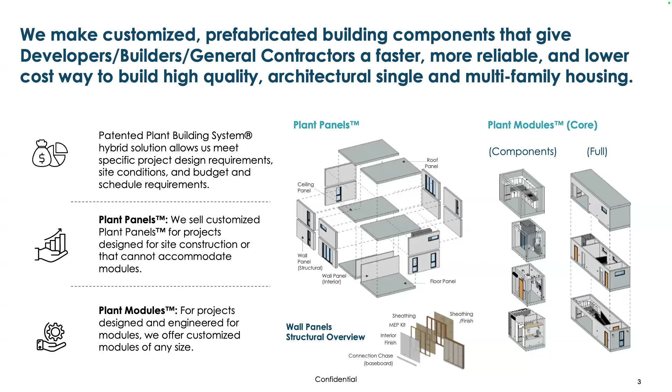As I mentioned, we have the only factory in the country purpose-built to do both panels and modules. Panels are like a part of a structure—a wall panel, ceiling panel, floor panel. Modules are volumetric; for us, they're comprised of panels. Both systems can do lots of different types of panels. We don't tend to do just framing—we typically give you your weather wrap, windows, door framing. We can even talk about MEP.

Each system has certain advantages and disadvantages, and we do both because our focus is to look at your design and figure out the most efficient way to build it. Modules are great because you can build in parallel to the site work, so you typically save a lot of time that way. We have an automated, all-weather facility, so we're able to dramatically compress production schedules. A 3,000 square foot modular home on average takes maybe 3 months in the factory, again in parallel with site work. For panels, it can be a week or two.

The downside of modules is that they can be expensive to ship and install, and because of the redundant structure and some of the limitations of transport, you have to think carefully about your design and how it's laid out.

Panels don't have the redundant structure, and by the way, the redundant structure is more an issue for multifamily. Sometimes you have to reduce unit count because of it. But regardless, oftentimes because of the issues with dimensions, it can affect how you think about space, both internally and in floor plan and elevation.

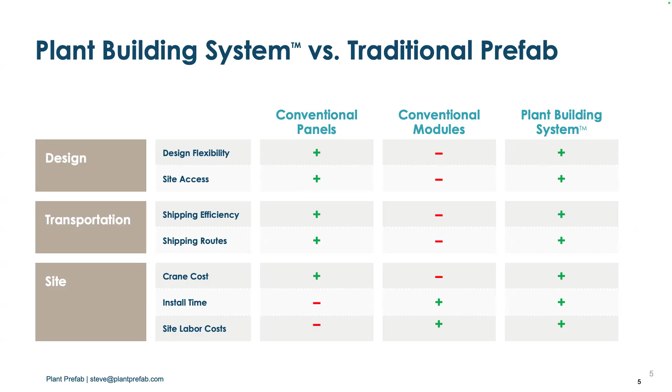For a panel project, we can use designs that have been designed and engineered for a traditional site-based process. For modules, it has to be designed and engineered specifically for modules. So panels are often the only solution based on where you may be in the design process, or maybe your site doesn't allow the transport and installation of modules. They both have certain advantages and challenges. We do both - some projects are all panels, some all modules. Oftentimes, particularly for single family, it's a hybrid.

So what are some of the advantages? Well, I alluded to one already - massive compression of schedules. We have a project, a duplex, 3,000 square feet in Venice. It was installed in March, end of March, and they're expecting the C of O any minute. That's a 7 month plus process from start of construction to C of O - much faster than a traditional process on the west side of Los Angeles.

Can be reduced cost, it's not always the case, it really depends on what we're doing where. We've got a developer - we did a number of homes for a development in Lake Tahoe, and the developer, who had built homes in the exact same area, actually on the same project, using a site-based approach, estimates we saved him about 20% from what it would have cost with a traditional process.

But like I said, sometimes it's not always savings on a per square foot basis, but that's not really fair. I mean, understand that everybody looks that way, but it's really project cost. And if we save you 50% of the time, 30%, you're saving money - carrying costs for your construction loan or equity if it's a developer, or rent if you're an individual living somewhere else before you can move in. So really, the right metric is total project cost.

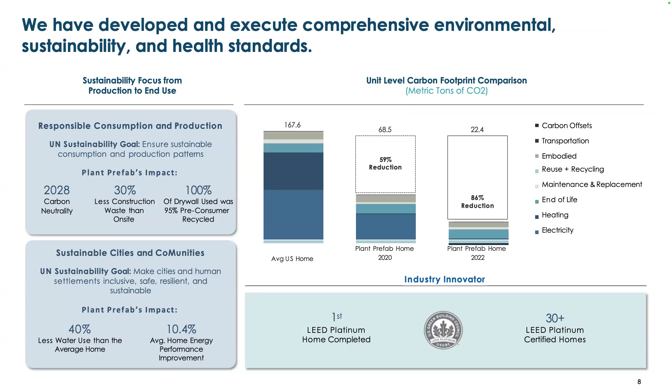As I said, we take sustainability pretty seriously. We've done more LEED platinum and gold certified projects than almost any other factory in the country. The multifamily project we did with Brooks Scarpa, we expect to get gold certified.

So that's 13 units. I'm going to show you some pictures of projects we've completed, and then we'll do a quick video of our factory, give you a tour of the facility. We are very busy with fire rebuild projects.

We have the only high capacity automated prefab facility west of the Mississippi that does single family homes. We're one of only two automated high capacity prefab facilities in California - the other one only does multifamily. We specialize in customized architectural projects. You're going to see a number of projects in design with other architects.

Here's one of 32 homes we did in Lake Tahoe, that project I mentioned earlier. The Ray Kappe in Malibu, that's the interior. And by the way, we are wood frame, but we have a steel shop - you'll notice some moment frames and steel staircases. We do that when it's part of the design, like the project we did in Palo Alto with Toby Long - there's one of those moment frames and steel structural elements to which I alluded.

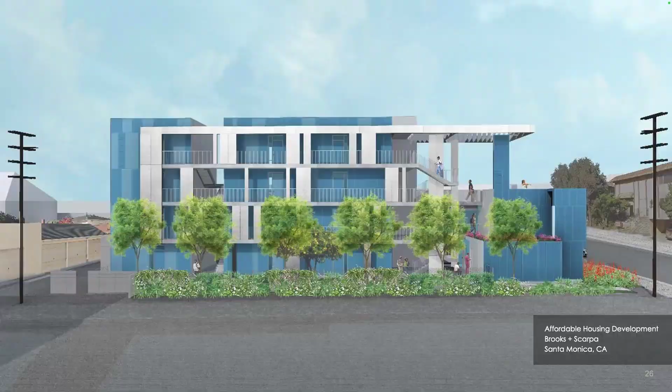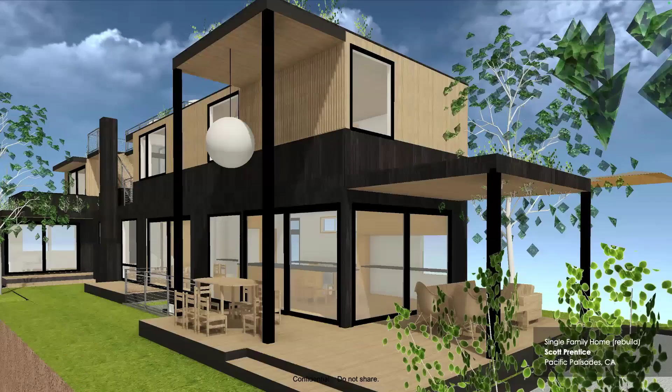This should be done, by the way, C of O in January. I just want to show you some of the rebuild projects first from Scott Prentice, and then you'll see some homes we're doing with bespoke design, and then with Toby Long.

So we'll, like I said, have some design guidelines, and you'll get more about this then. But a few thoughts: one big difference in working with prefab versus a traditional process is you really need to think through a lot of your design details upfront.

In fact, as you'll hear, we take your architecturals typically halfway through CDs, and we do a manufacturing model. You'll see an example of that. We do that because ultimately we need from that model the shop drawings, but embedded in it is the machine code that tells our automated equipment what to do, and you'll see that. But the other reason we do it is to clarify any coordination issues.

We're issuing RFIs at that point, and so we're working with you to clarify all this up front. In a traditional process, you have more time, frankly, to work on this. So everything gets front loaded, but then things move much quicker as a result. Your CD set really needs to be a very complete CD set, more so than some of the architects that we've worked with are used to.

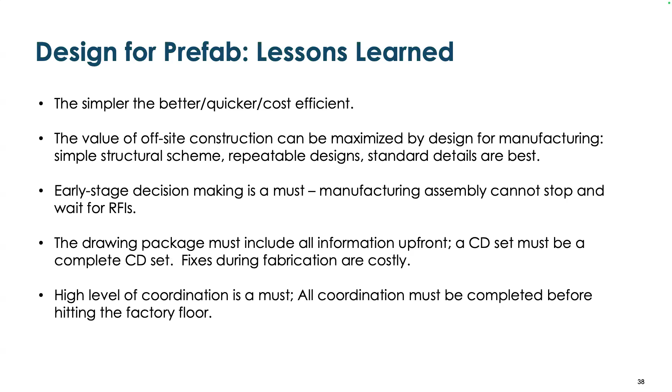And implied in this is a super high level of coordination, which really needs to be complete before we hit the factory floor.

So, some thoughts on how we work with you. If it's going to be a modular project, we want to work very early at the SD stage. We're happy to review any drawings you have. By the way, I listed my contact info—Seth, if you can enter your contact info too. We are happy to look at any schematic you have for any project and let you know if we think it's feasible to do modular or prefab panels.

Honestly, we don't even have to look at CDs—we could give you a bid for that, or really more your GC, because we can do panels for almost any project. Modules, as I said, have more limitations. So if you're thinking about modular and just want some sense of what you might be able to do, feel free to send us SDs, and we're happy to take a look and even give you some preliminary estimates of cost.

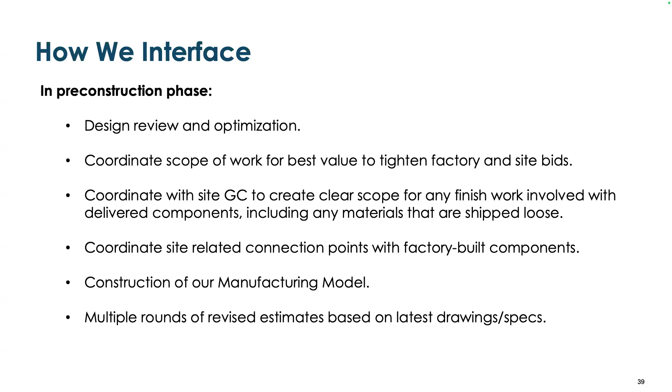But assuming we're working together on a more formal basis, so you've made a decision that this is going to be a modular project, we have a pre-construction agreement, and we're doing a few things with it. We're consulting during the design process, talking about the ways we might do this with some combination of panels or mods—again, it might be all panels, it might be all mods, might be a hybrid. We're giving you greater levels of estimates as the scope becomes clear as you go through engineering, and then eventually in the last phase, we're doing that manufacturing model that I mentioned.

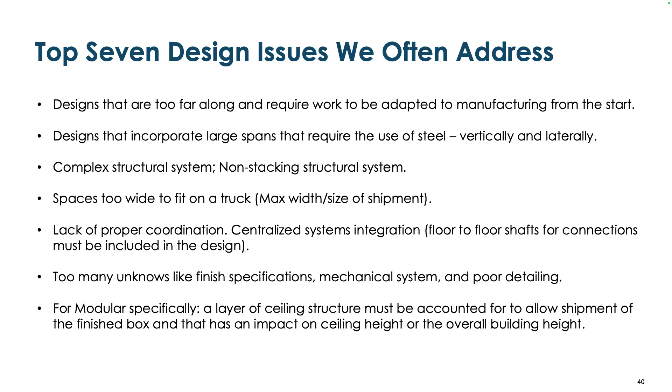And so it was economic to do it, but in general budgets are not as generous. So we advise keeping modules to less than 15 feet and no greater than 12 feet high. We can talk more about that. 40, 50 feet long, can be longer, but just to contain costs. So we're often thinking about how your millwork or plumbing might cross mod lines or how it might stack, and we can talk more about that specifically in the Q&A.

I should mention we do weekly tours, but I want to give you a quick video tour of the factory, just because I think it'll be helpful for you understanding what we do and how, and then we'll get to Q&A. So

as I mentioned, we're in Arvin, California, so it's right over the Grapevine, right off the 5. 270,000 square foot facility. So we can do, depending upon the mix of mods and panels, maybe 3 million square feet a year. So again, depending upon size of homes, 1,000, 2,000 homes a year.

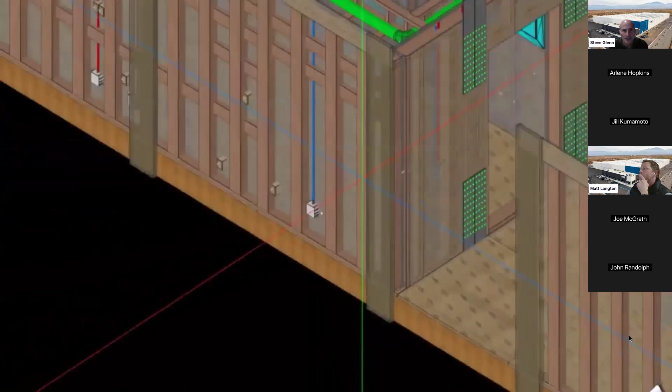But every project starts here. I mentioned the machine model. This is a 60 unit affordable housing project in Koreatown. And if you come visit us, you'll actually see the first unit, which we completed. So as I said, we fully coordinate your structural, mechanical, electrical, plumbing, your sprinklers, clarifying RFIs, then getting absolutely precise BOMs, and getting the machine code that drives our equipment.

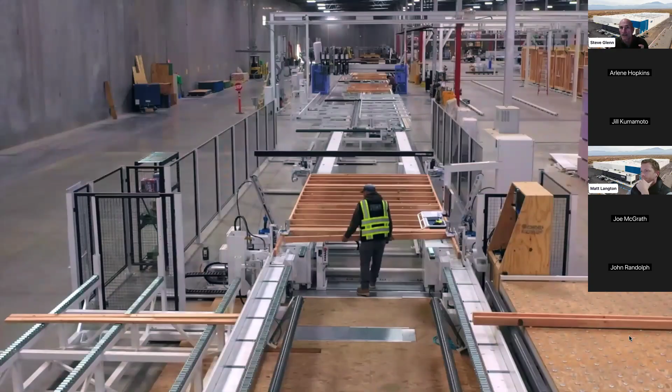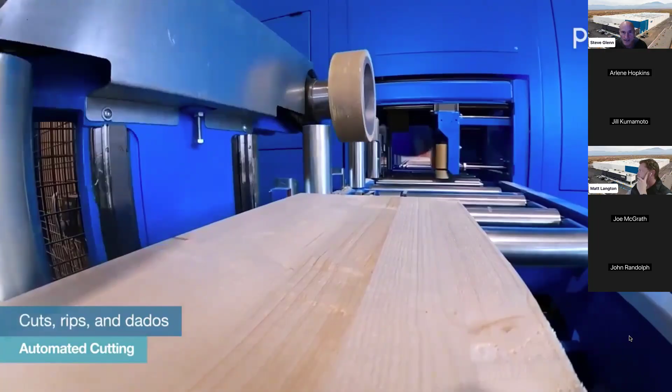And you're going to see monitors at each piece of equipment. In a second, you'll see the piece that's going through the equipment right now, and that's from that machine model. So this is where we cut every piece of lumber we use, every stud, joist, rim joist, and it not only cuts, it does any kind of complex cuts we need to do, at dados, at notches. It routes, so no plumber or electrician is measuring for piping or electrical. It's all done in that equipment.

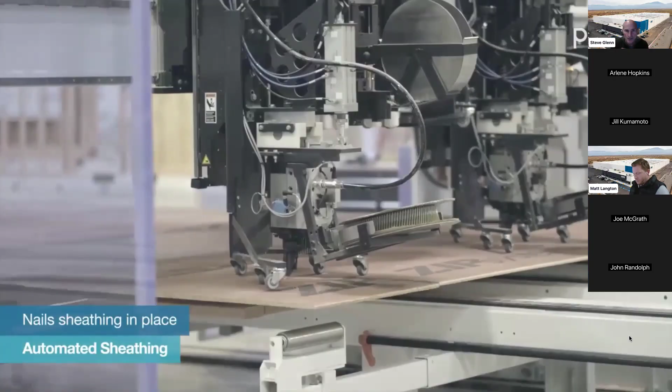Every piece of lumber is labeled. We know the project. We know where on the project. We have three automated panel lines. This is the line for wall panels. We have roof and ceiling and floor too. So you just saw a piece of equipment that automatically nails the studs and joists together. This then nails your OSB, your weather wrap, can even do drywall to the frames, cuts out openings for windows and doors, trims off any excess.

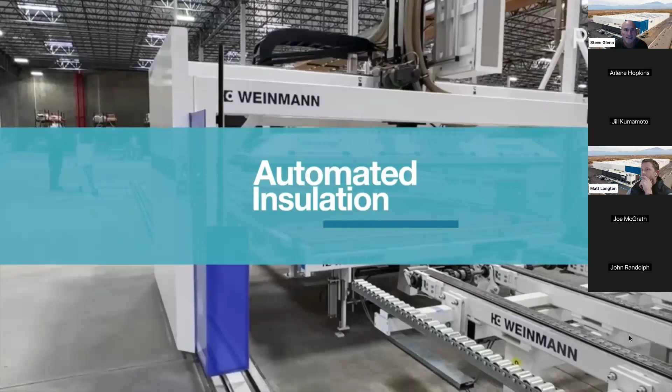This piece of equipment blows in insulation. And then we have panel bays. And by the way, one of the great advantages, our panels are absolutely level, straight, square, flush, with tolerances that are way below what you would find in a traditional process. In fact, when drywallers go to do their work, they're just blown away that there's almost no leveling, no corrections they need to make because it's absolutely

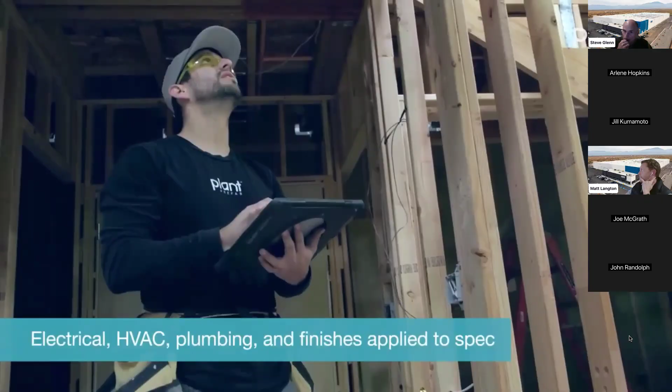level. On the panel line, you saw earlier installation of windows. We have three module lines with 7 stations each. So here's where we finish that drywall, put in millwork, put in tiles, grout, appliances, flooring, inspections are done there. We literally deliver with the modules inspection certificates. The local municipality has no authority to look behind the walls. If we get questions about permitting, we can talk about that.

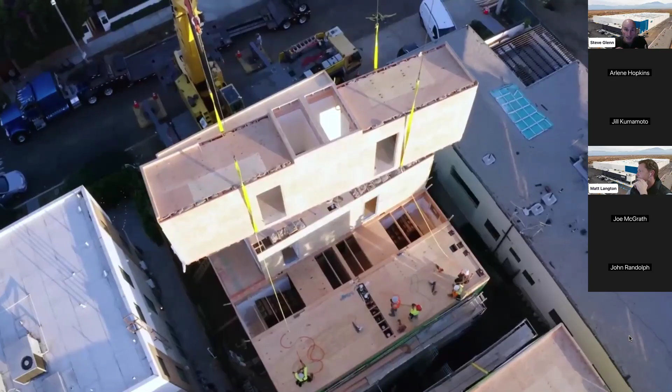We sell our components to GCs or developers, not to individuals. So in that sense, we're like a master sub. This is that LOHA project we did. So again, the first floor was panels on slab on grade, and the second and third floor were modules.

I know I'll get questions about cost, so I'll just mention this. The single family homes that we bid or built in the last year have ranged from 225 to 500 a square foot. That's our cost to the client. If you're wondering, well, what's total hard cost? So site work, transport, install, landscape, what are the hard cost budgets? A good rule of thumb is double our budget, so 450 to 1,000 a square foot. Multifamily, we bid or built in the last year, 125 to 300. Again, double that to get all-in hard costs.

So with that, love to get any of your questions. I'm going to make sure everybody can speak. I probably missed lots of stuff. Matt, if there's anything you want to add or correct, feel free. But look forward to your questions. Andrew? Yeah.

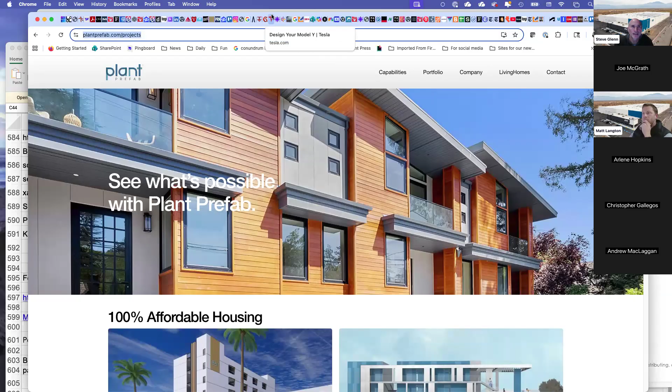But let me start by saying we will always do custom projects. That was a founding premise behind the company. Most prefab companies offer a catalog of homes, and we specifically started the company because we don't believe products will ever supplant or disintermediate architects. Can you see my screen? No. Okay. We think because lot sizes vary in cities, neighborhood to neighborhood, in different zoning, there will always be a place for architects and the work they do. We want to make that more efficient.

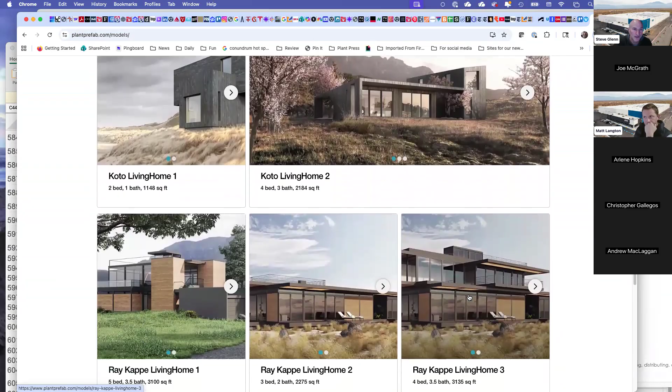Having said that, we have worked with architects, which hopefully you're seeing now, Koto out of the UK and Ray Kappe and others, to create some standardized plans, which we have done over the years, but they almost always get customized. We're going to introduce, working with some of the architects we're working with now, standardized homes designed for some of the Palisades lots and Altadena lots.

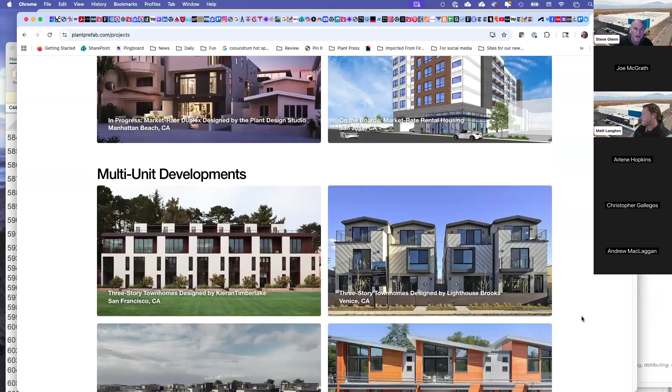So that is something we want to do, but we'll always do custom work too. And then, by the way, I'm showing you some of the projects that we're working on in affordable and multifamily or have done. This is all at our website. We're working with developers who are sort of doing what you're saying, Joe.

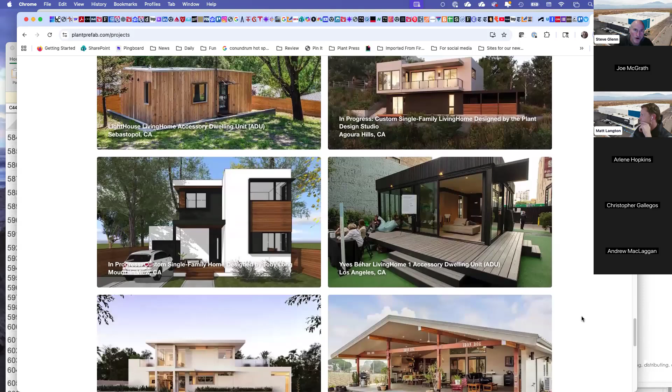One in particular, we did 4 homes for him in El Segundo, and he's using SB 9 and 10, which allows you to essentially do small lot developments. He's bought a number of them, and we sort of designed a product with him and his architect, and he's deploying it across a variety of sites. So developers are also kind of doing that themselves, creating products, and we're in a position to support both custom projects and products and projects that may start as products and go from there.

John, yes, I was curious, have you ever embarked on a SIP or structurally insulated panel project? Matt's smiling. Our panels, we've never just done a SIP per se, which is framing and insulation and OSB. Our panels almost always have windows. Sort of take what you just said, add windows, add weather barrier. That more often is the minimum, but I mean we're open. I'm not sure we're the most cost-effective pure SIP provider.

Right. And then another question I have is if you could please restate your maximum module dimensions. There's no maximum. No max, in terms of just traveling over land. What do you want to pay? The maximum depends on the budget and physical accessibility. The wider it is, the more expensive it is. What would be the ideal for keeping it from becoming stratospheric?